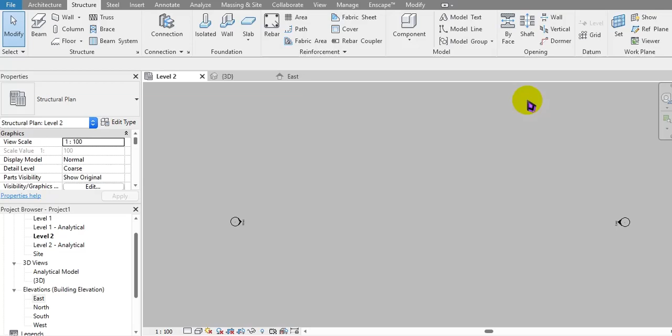Alright, first let's draw some grids. Okay, so a kind of simple building here.

Now let's fix the foundation right in here, so get into structure, foundation, isolated foundation, and I like to place the foundation right at grid. So a simple method, all the foundation is okay, but that's okay for now.

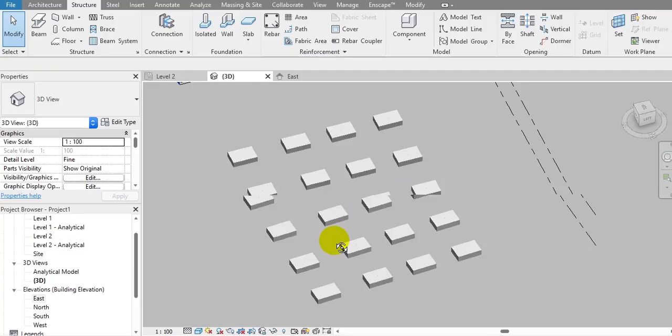We got the structure foundation right here, and then let's try to place a column right there. So I'll be having a nice column right at grid. Alright, that's okay, enable it.

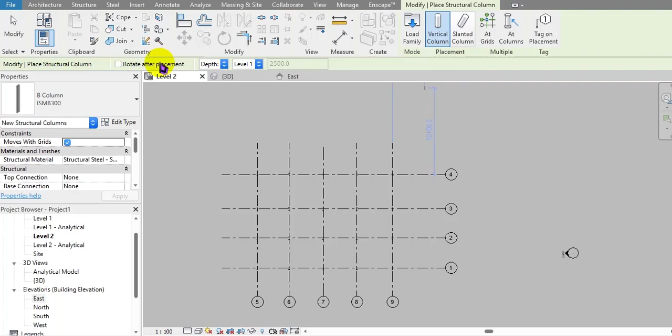And also finally, let's place beams right there. So get into level 2, be considering beam, and okay, it's an ISMB section on the grid. Alright, that's also okay for now.

And get into 3D view. I don't want to see any sort of analytical model here, so I can get into visibility graphics and turn off the analytical model.

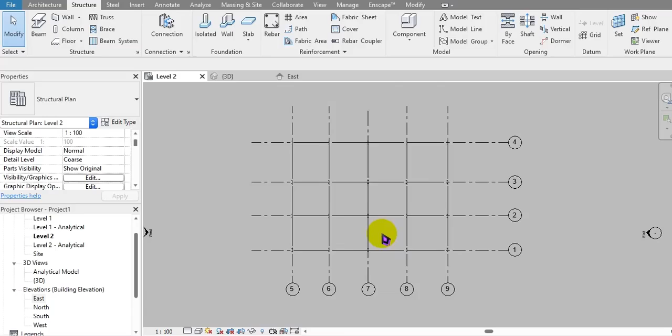Next let's place a bracing right on grid 1 and grid 4. For that, getting into south elevation, I'll be placing the asset right on grid 1 and grid 4. So pick up bracing, grid 1. Okay, grid 1. I like to have a round section here.

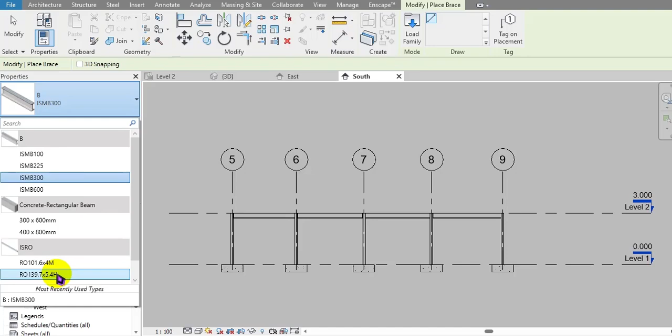Okay, then... oh man, I hate physical drawing.

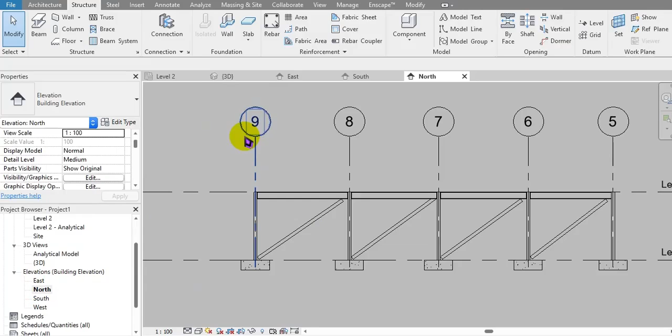So get into level 2, understand the grid, that'd be 4, and get into elevation. It could be south elevation, or you can get into north elevation - it's up to you what elevation you want to pick. And get into brace, grid will be 4.

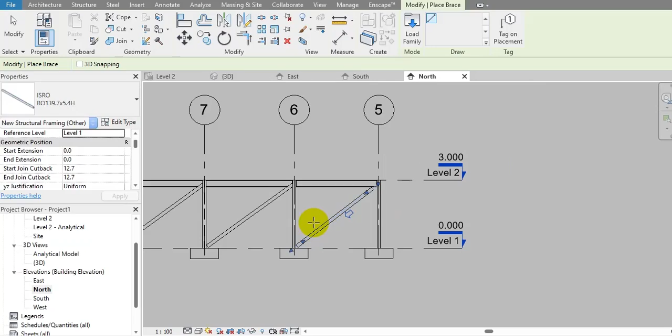Well, I can physically drop the things like that, or you know, you can copy that, but I'm not interested in copying assets, especially in Revit - it's a time consuming process. Right now I have drawn it, or you can copy that. I'll show you, copy that stuff. Okay, I will show you that.

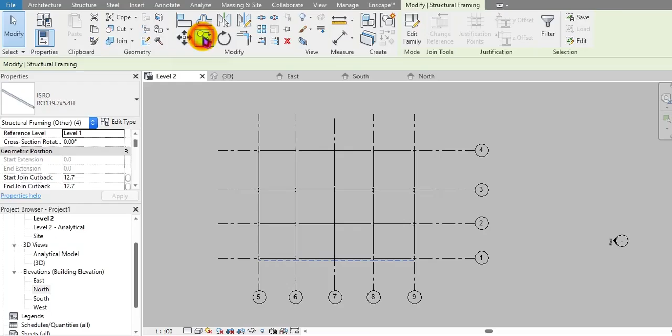Deleting. I can select up all these assets. Then get into level 2. I can copy, constrain, picking up well the grid 1 first grid here, and the second will be right at the midpoint of the stuff. Alright, get into 3D. You can see that's been here. Okay, that's so cool now.

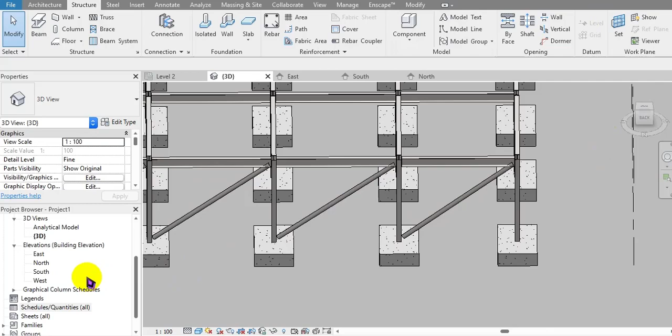Alright, so now let's see a kind of graphical column schedule. Right now that will show the schedule of these columns here. You can see the columns locations being given, the height of the column location 1, 5, 1, 6, 1, 7, and all of these are column location.

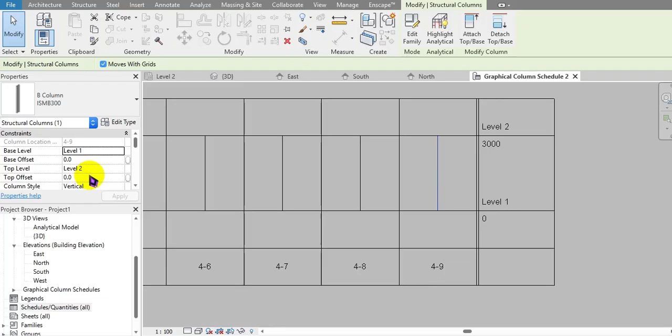Right, so now if I try to offset the column maybe just like 2 meters above, you can see that is updated right in here, and also the same case shall be updated right in here also. Alright, so that's all about graphical column schedule. It shows a graphical representation of all the columns right inside of Revit structure.

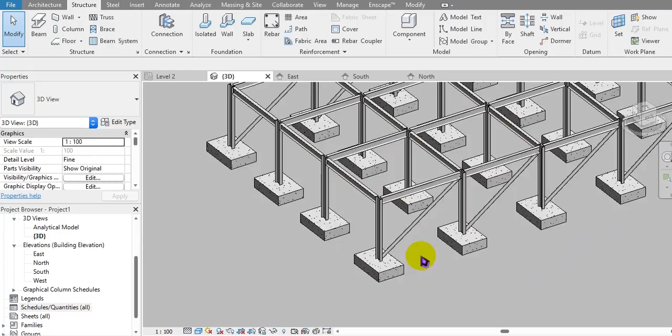Okay, this is sort of a definition. And also let's try to provide some connections here.

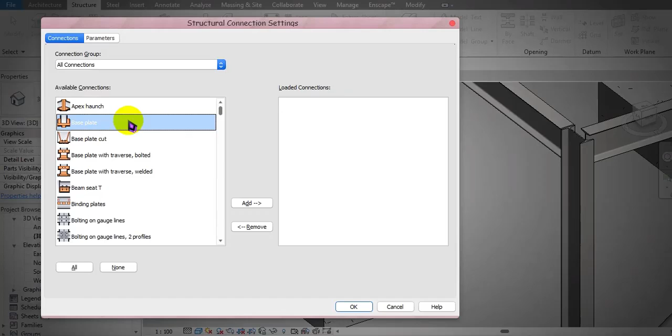Right in here, I'd like to apply a sort of base plate. For that, I like to open the dialog box for connection. Alright, so let's pick up the base plate, or base plate with traverse, bolted, or whichever you like to pick up. Okay, and then connection. I'd like to pick up the base plate here, and I'll be picking up column and hit the enter key.

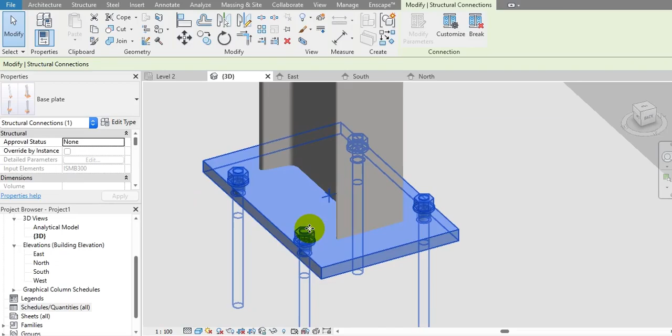Alright, okay, so give it some time to think. That will be showing the connection right there. Alright, okay, so what you can do to propagate all this connection into every column is right click, propagate connection. Alright, so that sort of connection is everywhere right now.

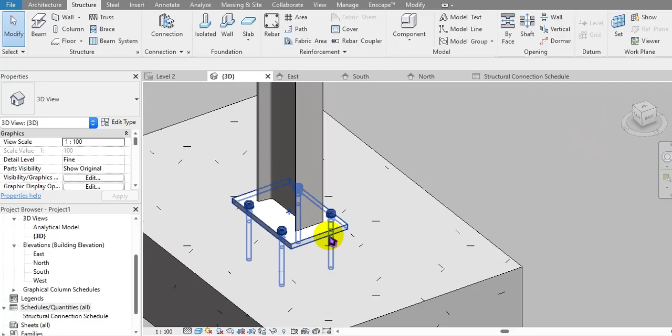So that's all about the base plate connection right here. Okay, you can just get into the modifying parameters, and you can get into here. You can weld, you can convert everything, or you can add up anything which you like - weld, stiffener, and plate.

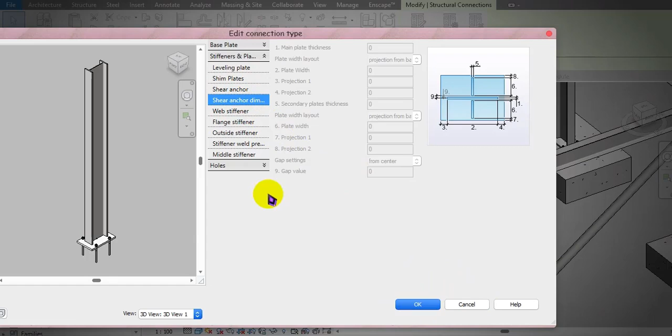Alright, I'm not getting into it as this one might get so complicated, and this one and all are self-explanatory. Well, you want to create a stiffener right there. Okay, so there's a stiffener right there, and stiffener is right there in every base plate. Great.

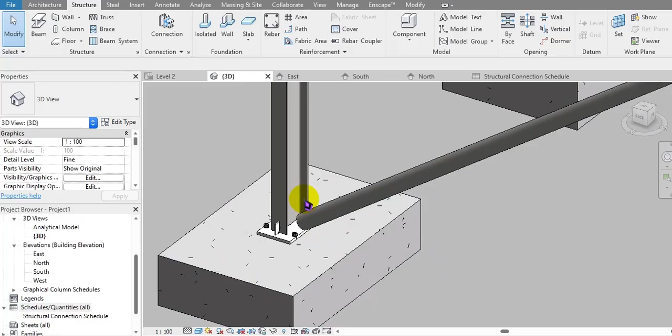So now let's care on what's happening right here. This be like tube connection, and I like to pick up the single tube gusset with kidney hole. Okay, add it. I'm not using any of this thing, so I can remove it. Connection.

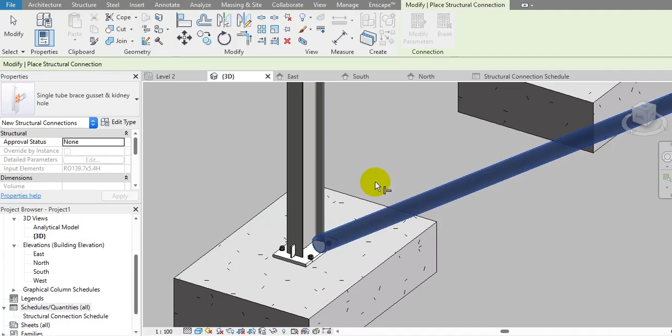Kidney hole. I like to pick up this bracing and the beam. Trying to hit the enter key. You can have this sort of connection right here known as kidney hole, and propagate connection.

Alright, now let's see what's happening here. Beam and column, connection drop down. Let me try a clip angle here. Okay, then connection, clip angle. Again, hold control and pick up these two assets and hit the enter key. Yes, cool. Clip angle is okay, and I can propagate the connection.

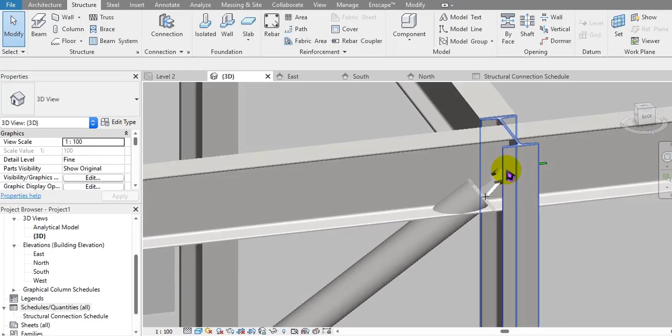Oh wow. Okay. So yeah, that's it. There you can see everywhere you can see the clip angle was being there.

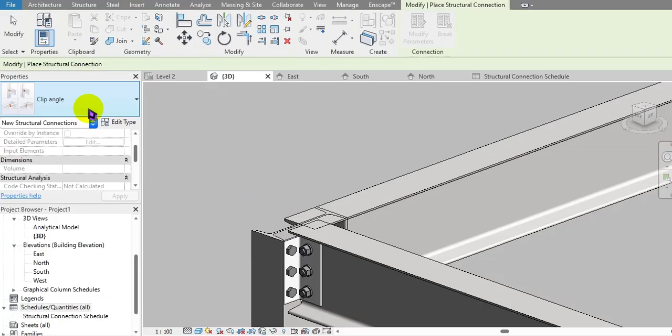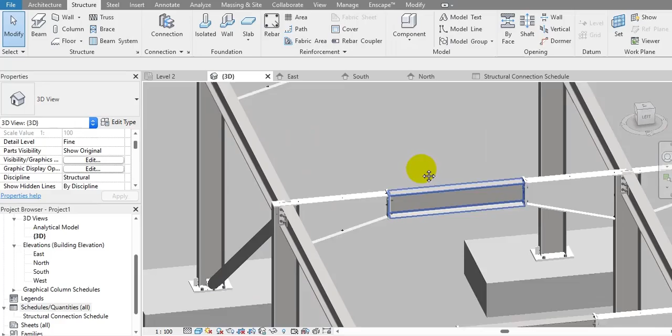So now let's see what can be done right in here. I got a clip angle right in here, and I got a clip angle right in here. So that's how simple it is, as you might have seen how simple it is to create a kind of a steel building right in Revit structure.